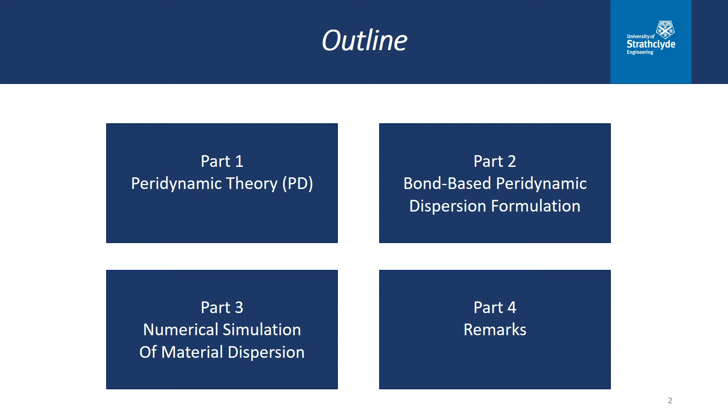In this section, I would like to give you a brief introduction of the peridynamic theory. Peridynamics is a new continuum mechanics formulation. The classic continuum mechanics was proposed by the French mathematician Augustin Cauchy. It assumes a continuous body under smooth deformation with a differential equation. Since there are no partial derivatives defined with respect to the discontinuities, the theory has constrained the formulation of discontinuities in damage and failure problems.

Dispersion curves that describe the relations between the wave frequency and the wave number are linear according to the classic continuum mechanics. However, based on the experimental dispersion relations obtained by inelastic neutron scattering, we found most materials exhibit nonlinearities at a small wavelength. So the classic continuum mechanics fails to predict this phenomenon because it doesn't have a length scale parameter.

Non-local continuum mechanics is becoming extremely popular in the development of new materials and systems, such as carbon nanotubes or graphene. Peridynamics is a strongly non-local theory proposed by Dr. Silling in 2000. He is a distinguished researcher at Sandia National Laboratories in the United States. It employs a non-local model of force interaction and replaces the partial differential equations, which can model the cracks of structures in a spontaneous way.

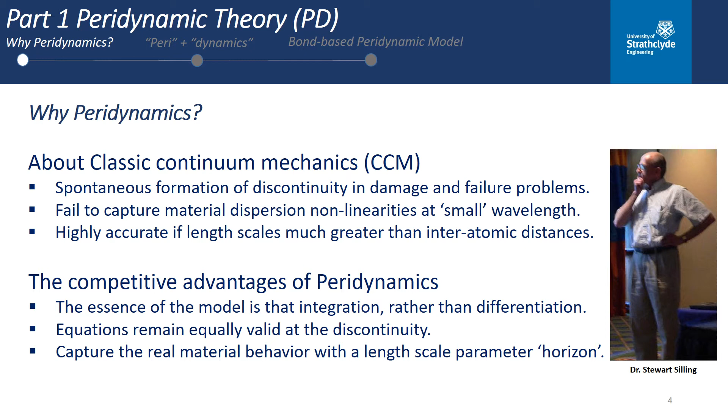So let's have a look at what peridynamics is. Peridynamics is a physics of a material body at a point that interacts with all the points within its range. As can be observed in this figure, the structure is discretized into a series of material points. The material point can interact with other material points within a range. The range that the material point interacts with others is defined as the horizon. For any surrounding material point beyond the horizon range, the material will lose the interaction.

The bond xi is defined as a position vector between two material points in the undeformed configuration. In this figure, xi represents the relation between material point x and x prime. Y represents a position vector between two material points in the deformed configuration.

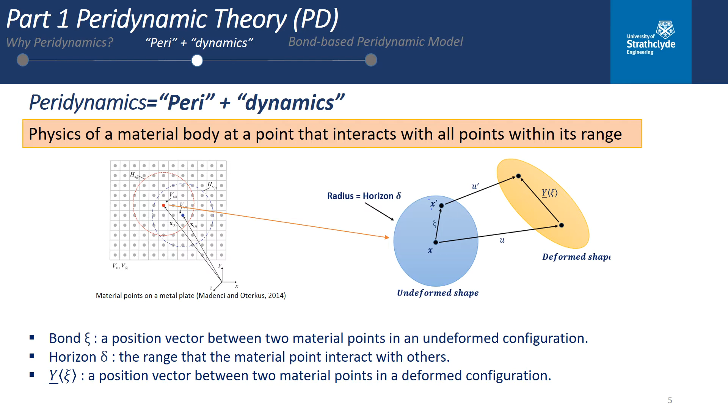The equation of motion at a material point x in peridynamics is in an integral form. The bond interaction f in the equation of motion is the exchange of force between any pair of material points. As shown in the figure, in the bond-based peridynamic model, the pairwise force density vector is equal in magnitude but in an opposite direction. The force density vector in each bond is explicitly related to the bond constant and the stretch. The bond constant is linked with material constants from the classic continuum mechanics.

The stretch is defined as a position vector between two material points in a deformed configuration divided by a position vector between two material points in an undeformed configuration.

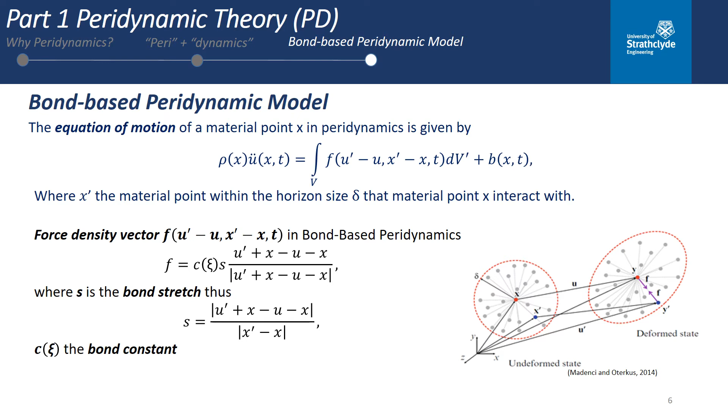In the second part, I would like to explain how to derive the closed-form dispersion relations in the bond-based peridynamics, which will be demonstrated in the one-dimensional, two-dimensional, and three-dimensional forms separately. As mentioned in the previous section, the pairwise force density vector between two material points within the horizon size can be related to the bond constants and the stretch.

More specifically, the stretch is related to the displacement field of the paired material points and their position vector in an undeformed configuration. Since we are focusing on the dispersion characteristics of the waves based on linear peridynamics, to assess the wave dispersion, we are using a harmonic plane wave solution for the displacement field of the material points. In the plane wave solution, Q represents the response amplitude, K is the wave number, X the position vector, and omega the angular frequency.

By using the plane wave solution, we obtain the displacement field for the material points X and X prime, substituting them in the stretch and then into the equation of motion. We can find that the equation becomes an integral form with a cosine function over the horizon size. In the one-dimensional case, the bond constant for the isotropic material is given, where A is the area, which can be cancelled with the area in the equation of motion.

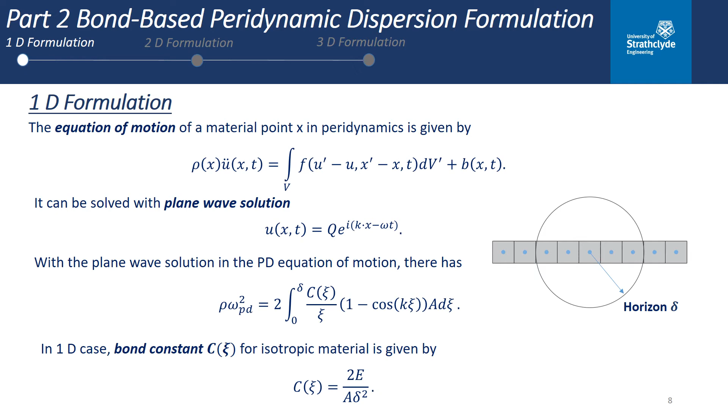Once we solved the integration part in the equation of motion, an explicit solution can be found for the peridynamic equation. At this point, we have found relations between the angular frequency and the wave number from the peridynamic equation of motion, which represents the material dispersion for a one-dimensional structure.

To validate our dispersion relation, let us consider a relation between the peridynamic theory and the classic continuum mechanics. The cosine function can be expanded with a Taylor series considering the first two terms, substituting into the equation of motion and performing integration, leading to an approximate form of the dispersion relation.

As mentioned earlier, the classic continuum mechanics doesn't have a length scale parameter, while the peridynamics does. So let's reduce the horizon size to 0. As we can observe in the equation, the peridynamic dispersion relations become the dispersion relations in the classic continuum mechanics.

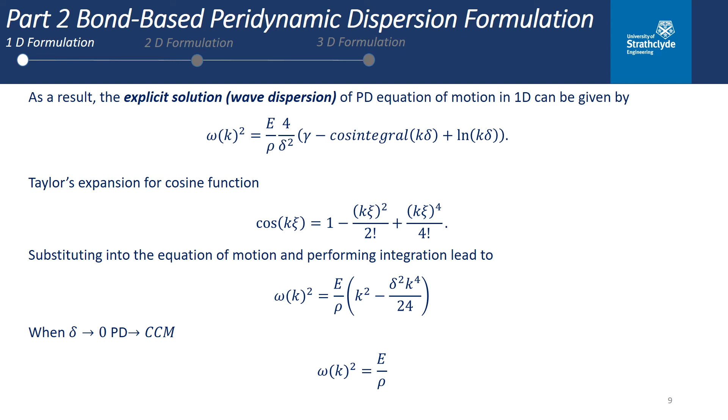The dispersion relations in the two-dimensional structure follow a similar procedure to our one-dimensional case. First, we also need to find the total stretch between two material points. The displacement in the x direction for the material points x and x prime can be represented by u and u prime, while v and v prime are the displacement in the y direction. Therefore, we can find the total stretch for a bond.

Considering the wave propagation in the longitudinal direction, v prime minus v times sine theta is equal to 0. So we can find the total stretch of a bond in the longitudinal direction is the total stretch times cosine theta. Similarly, the stretch in the transverse component is the stretch times sine theta.

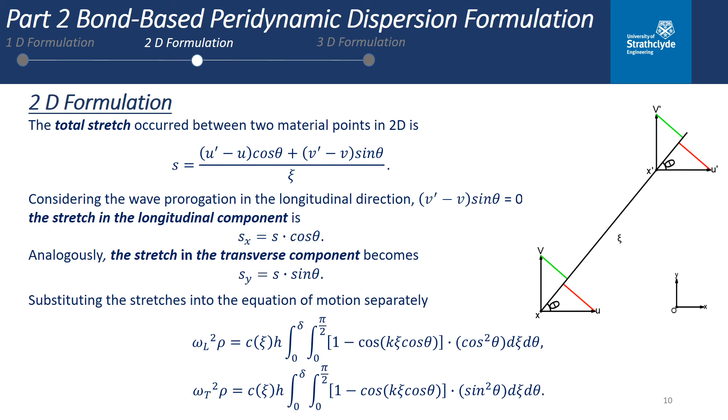It would be easy for us to carry out the integration of the equation if it is written in a polar coordinate system. Substituting the stretch we found into the equation of motion, we now have two equations in the longitudinal and transverse direction in a polar coordinate system. In the two-dimensional case, the bond constants for the isotropic material are given, while h is the thickness, which can be cancelled with the thickness in the equation of motion.

By solving the integration parts in the two equations of motion in the previous slide, now we have the wave dispersion relations in the longitudinal direction and the transverse direction.

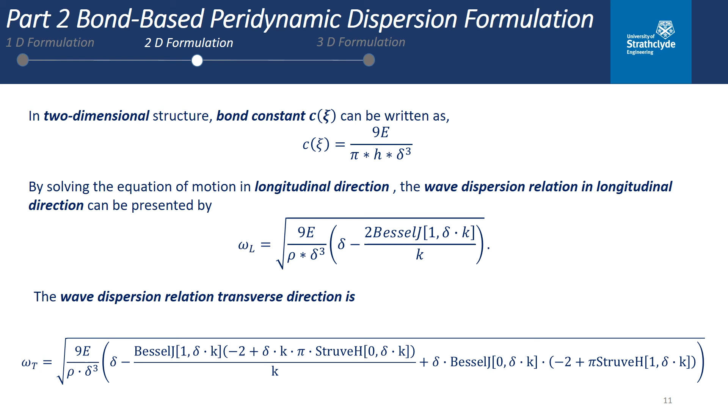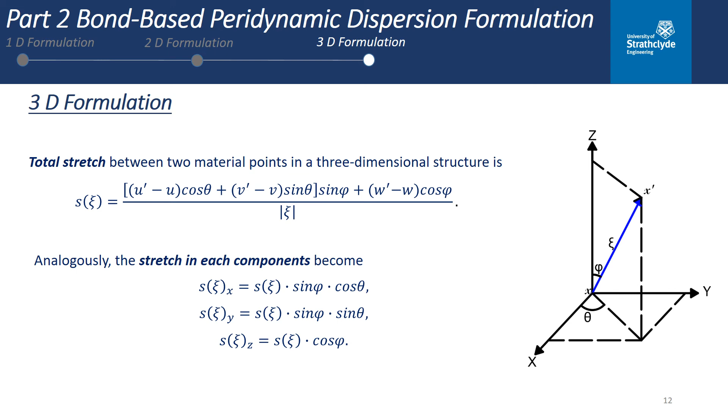To obtain the dispersion relations for a three-dimensional structure, first we also need to find the total stretch between two material points. We use U, V, and W to represent the displacement in the x, y, z directions respectively. We first found the total stretch mapped on the xy plane and then derived the total stretch in the xyz coordinate system. This is the total stretch between the material points. By applying the trigonometric functions, we can find the stretch in the longitudinal, transverse, and vertical components.

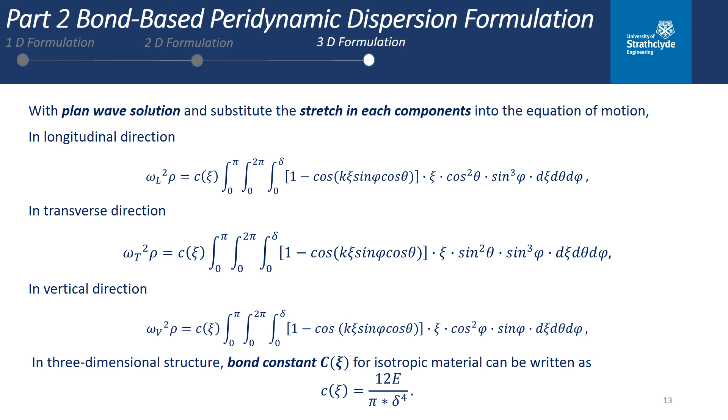Again, it will be easy for us to carry out the integration of the equation if it is expressed in a polar coordinate system. Substituting the stretch we found in three components, we now have three equations of motion. Here, we also have the bond constants for the isotropic material in a three-dimensional structure. Substituting the bond constants into the equation and solving the integration over the bond distance, now we have the wave dispersion relations in three separate directions.

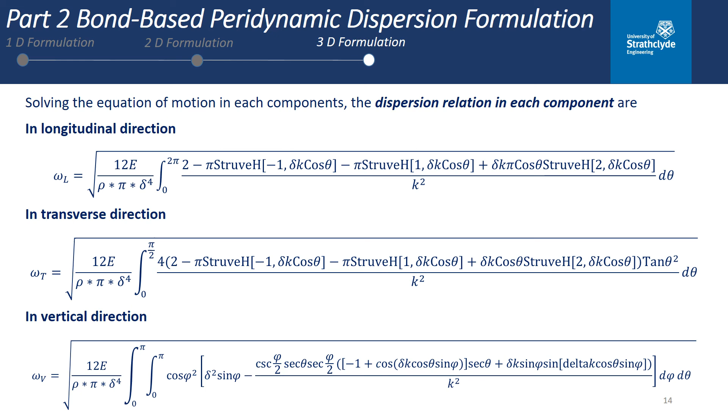The closed-form dispersion relations in bond-based peridynamics have been obtained in the previous slides for the one-dimensional, two-dimensional, and three-dimensional structures separately, all of which are in terms of material constants, density, and the peridynamic length parameter, which is horizon size. In the third section, we would like to examine our dispersion relations based on the material experimental dispersion data.

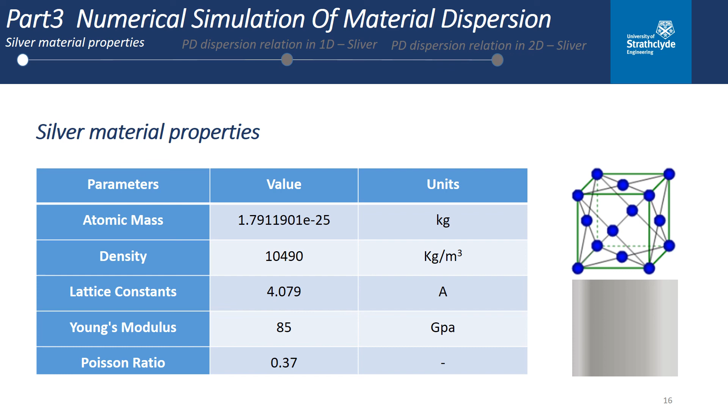In the two-dimensional case, the horizon size 2.6715 times 10 to the power of -10 can provide close agreement with experimental data in the longitudinal direction, but a limited match with experimental data in the transverse direction.

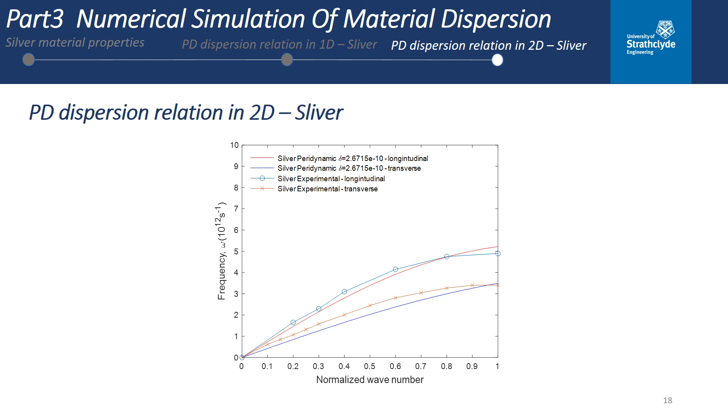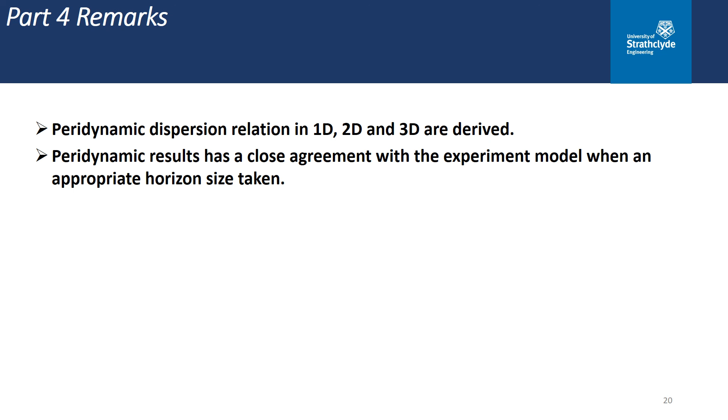Now we are going to make a final remark for this research. With the original bond-based peridynamic formulation, the peridynamic dispersion relations have been derived in one, two, and three dimensions. They have nonlinear forms in the peridynamic length parameter, which is horizon size, so the real material behavior can be represented for small wavelengths when an appropriate horizon size is taken.